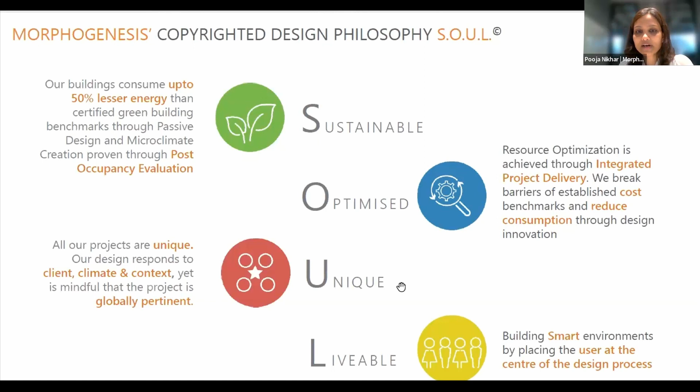We strongly believe in resource optimization. Each and every project we take on in our organization, we try to respond to the client's need, climate, and context, so it becomes unique in itself. And fourth, but not the last, we try to make every project more user-centric, with a smart environment, and more livable for the people who are actually part of the project—the end users.

Today I'll focus majorly on sustainability, and I have listed some of the factors that we try to implement in residential design, which are microclimate, passive design, view analysis, walkability, and lastly, the green rating.

For microclimate, to achieve that we follow very basic principles of site shading, how to harness the winds and evaporative cooling in dry months, and as much as possible, try to avoid UHIE materials.

I was also very keen that high-rise buildings should try to integrate passive design strategies, and this can actually become a new toolkit for upcoming high-rise buildings. So when we talk about passive design, we maximise the orientation and minimize the facade area, and use thermal buffers like courtyards, verandas, and shading walls, which may help achieve passive design even in high-rises.

Then very important are the views. As Shruti ma'am also mentioned, half of our views are now restricted because most of our buildings are air-conditioned. But we feel that for human comfort, views are very important. And when we go high-rise, that probably becomes even easier to achieve, because you're already a level up.

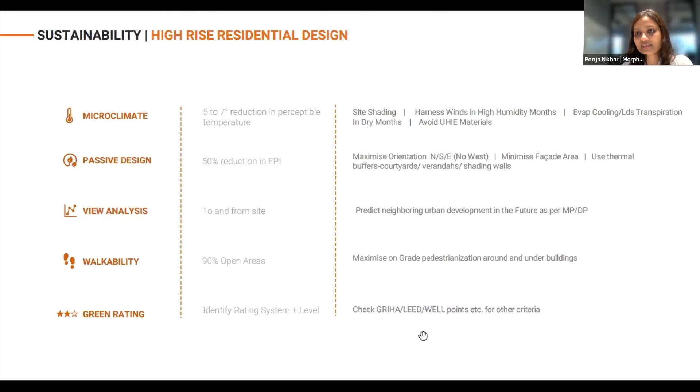When we talk about walkability, we believe that since most of the ground is now freed up by going high-rise, most of it is available for pedestrianization and open areas. Lastly is the green rating, which is probably achieved through all these factors—when you put in this kind of design, green rating probably is achieved automatically.

I'll start with one of the projects in Gurgaon. It's a high-rise residential project known as Mahindra Luminare. As I was mentioning previously, this project came into play when we observed that the lifestyle in Delhi and Gurgaon was predominantly low-rise bungalows. We have been living in such a scenario for a very long time. But now, due to urbanization and migratory pressures, we are left with not many options but to go high-rise. So this project aims to bridge that bungalow format into a high-rise.

So, a few of the parameters that we used—this is a site plan, as you can see. The design of the tower was conceived as a very compact and slender building form, minimizing the ground coverage and providing more amenities on the ground. If you look at the figures we achieved, only 15% ground coverage, and most of the ground was utilized for landscape area, with 100% pedestrianization.

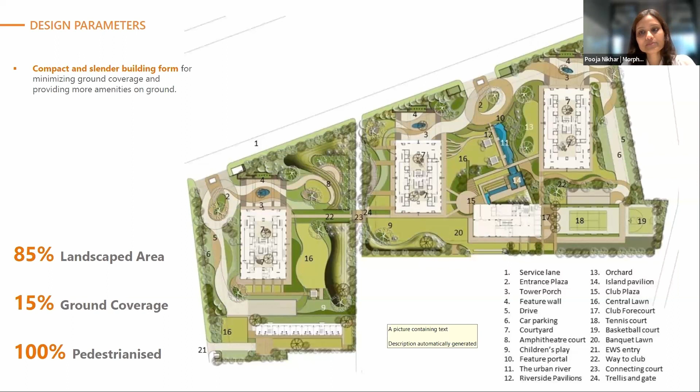Then talking about the planning. As we see in the traditional bungalow plan, there was always an open place and the built form was always on the periphery with huge or very deep verandas. So we actually tried to bring this format into a high rise.

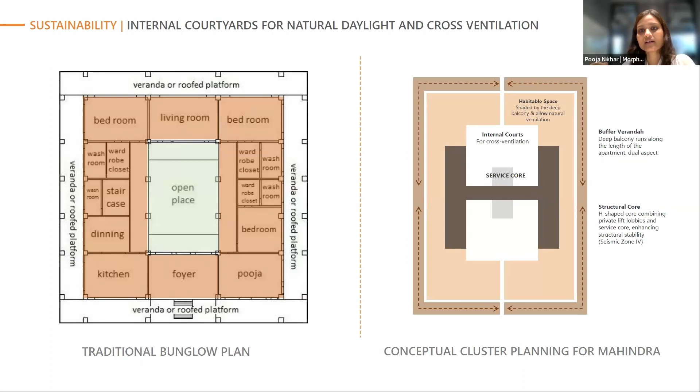If you can see, there is a conceptual cluster plan where the units are on the periphery with two internal courts, which I'll demonstrate later, used for cross ventilation in the entire scheme of things. There were wraparound balconies that act as a buffer or a deep balcony, giving a feel of that bungalow sort of thing with more space.

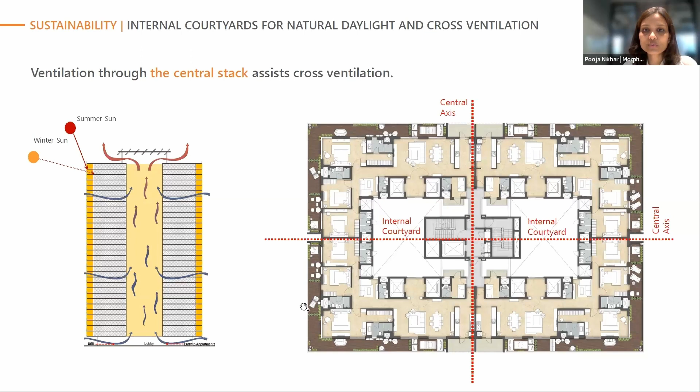This is more or less the planning where this forms one unit with an internal courtyard. So every unit is naturally ventilated through a central stack effect, and every unit gets cross ventilation.

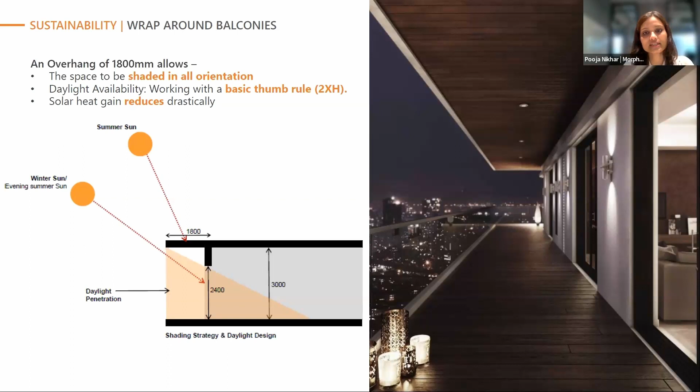Moving forward, as I mentioned about the wraparound balcony, all the units became dual aspect units where we gave around 6 feet wide balconies all around. They not only provided additional space and a feel of a bungalow in high rise, but since it was 6 feet deep, it was always shaded in all orientations, and there was also a significant reduction in solar heat. This is one of the actual images from the site.

Moving forward, I would want to showcase another project in Gurgaon called DG Homes. The master planning of the site was a result of comprehensive daylighting analysis, because as I mentioned previously, we are very much focused on passive design strategies. The idea was that during winters and with the landscape that was there, the ground plane is shaded during summers in some parts.

Whereas the sun comes in during the winters in certain portions, so the landscape becomes usable throughout the year.

If I quickly go through the site plan, most of the towers are oriented north-south, so the longer face of the tower is always in the north-south direction. We also tried to have a central core with 4 individual units, so they became like a 3-sided unit.

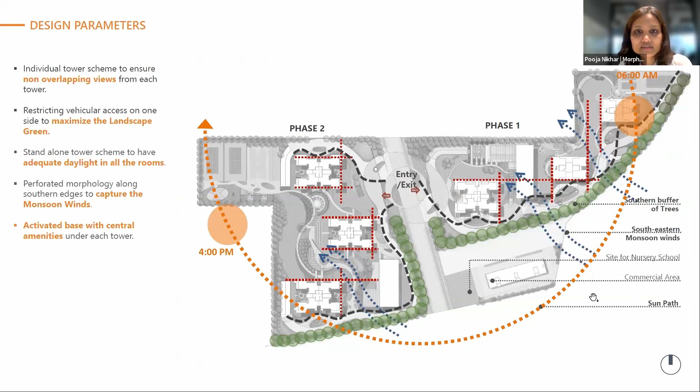If you see, they are 3-sided units with ample natural light and cross ventilation. Again, it's a feeling of still living in a high rise but having your own personal space, getting the same amenities probably as when one was living in a low rise apartment.

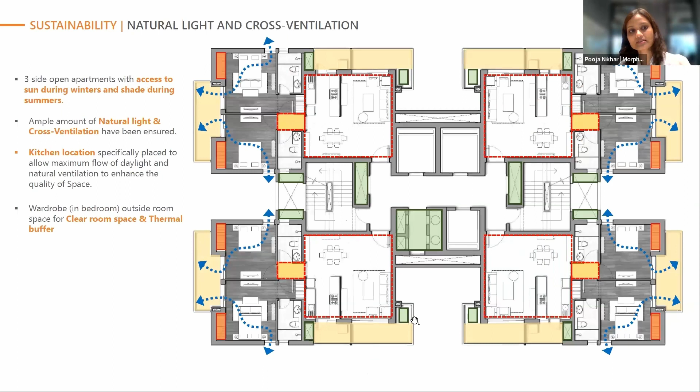Also, there were technological advancements that we provided because we had given smart home provisions in these units.

Then again, when we were discussing, as Shiti ma'am also mentioned, that probably the need of the hour moving forward is that there has to be mixed use in high rise. So this is one of the projects in Pune, which is again a residential and commercial project, a mix of residential and commercial on the lower ground, with the upper floors all residential.

And to add to it, we have a 2.5-acre rooftop terrace. So in such a high density, high rise building, when it's becoming mixed use, probably the ground, where in the previous projects I showed you is where you play, is now moving upwards with all the amenities going upwards, probably because of better quality of air.

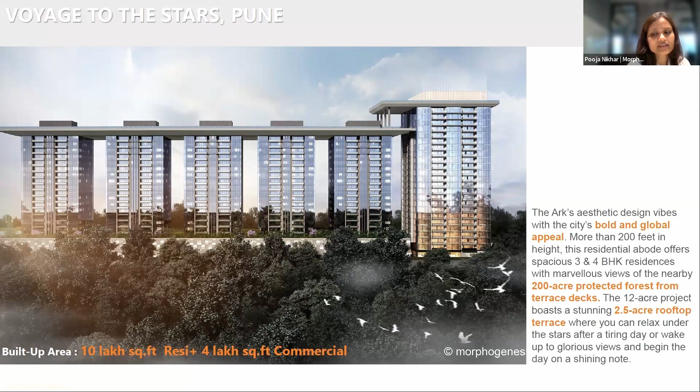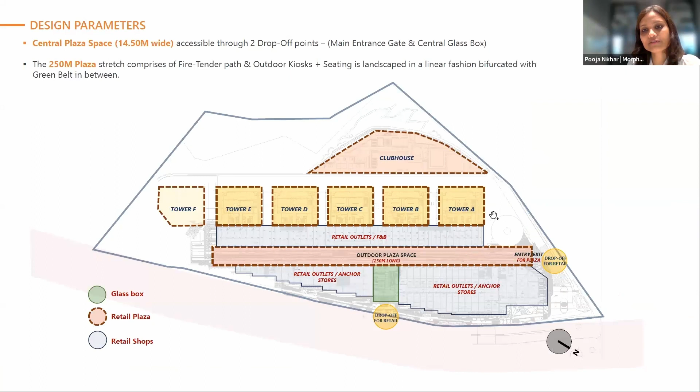I'll show you in the coming slide. This is the basic planning where the entire ground in the front is retail, and there are 6 residential towers with around 2.5 acres of deck with amenities.

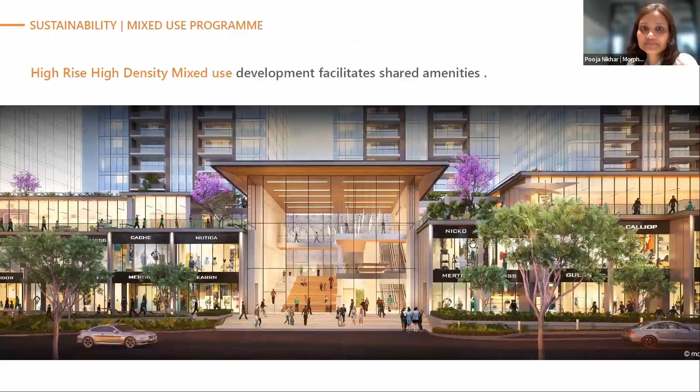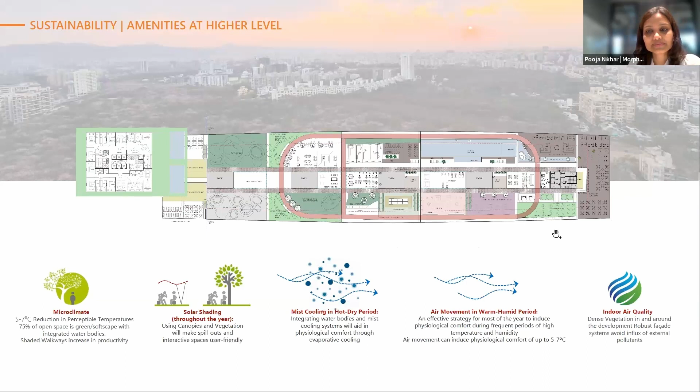This is one image of how we have conceived this high rise, high density mixed use development with shared amenities. As you can see, all sorts of activities that can happen on the ground have gone to a higher level, so that you get a sort of experience, better air quality, and better views. These are some of the imageries of the same.

So I think that's it from my side.